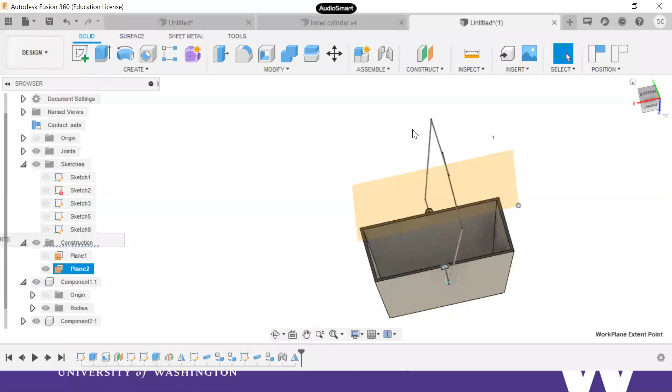I already have a rough, non-dimensioned basket. As you can see, the handles don't really meet each other because they weren't dimensioned properly. But before I get into those details, let's first see how I make the wireframe aspect of the basket, and how to make a basket such as this.

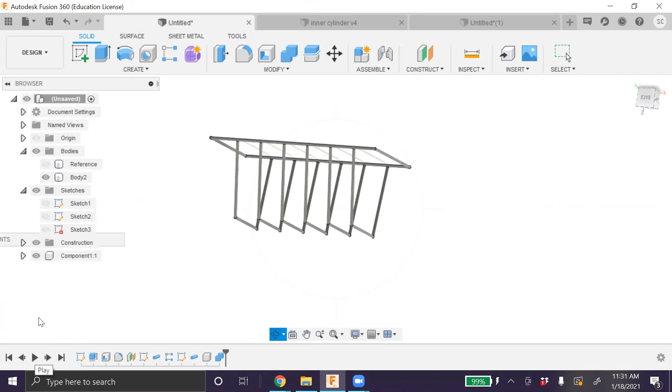Let me slow it down and switch on all the reference planes and sketches so that they're all visible for you. Let's go back to the timeline and see.

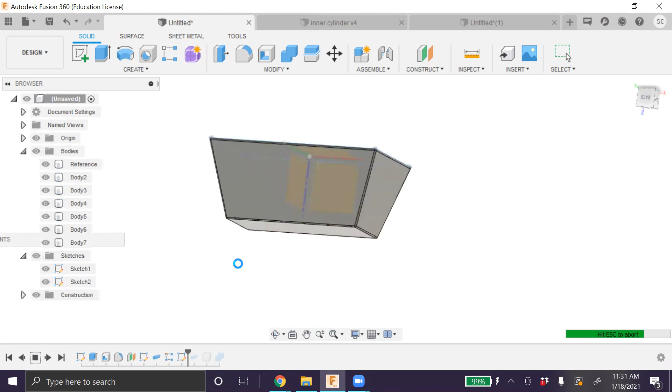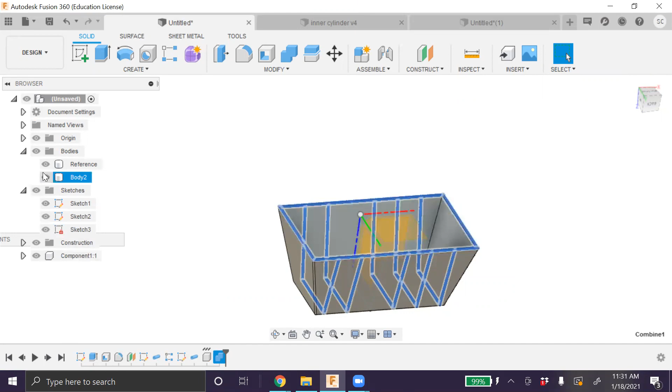So: extrude a box, give it a taper angle, draw, give it a fillet, draw the outer curvature, make pipes out of it, and hide the base body so you can see the structure.

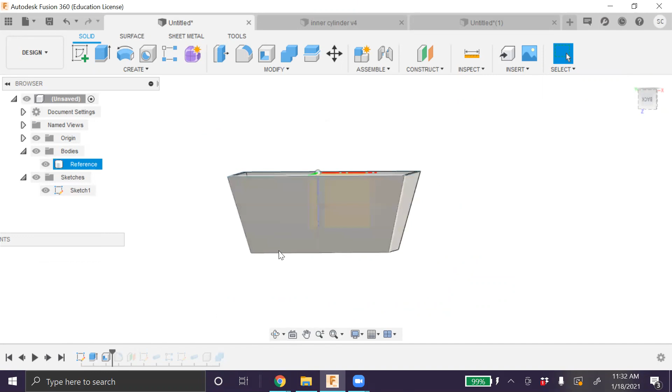Let's look at it a little more slowly, one step at a time. What I have is a basic structure that I extruded. I used the shell command to create the hollow basket shape. Now I have the basic shape of a basket, but this is not yet a wireframe model.

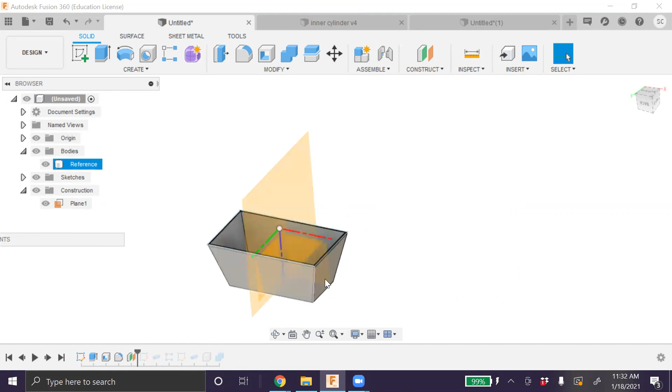So I go ahead and add some fillet, and then take a reference plane. I create a reference plane along this one, so you can see what construction is on which plane. I create this plane in the mid plane between this plane and this slanted plane, and then I draw a U-shaped, or rather V-shaped, line.

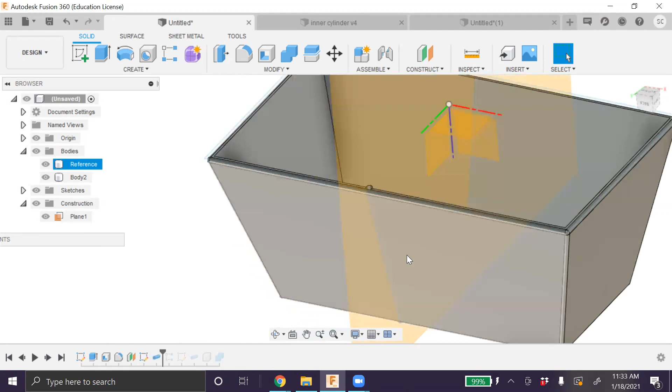This, as you can see, is very similar to the outside portion. If I go ahead and give it a pipe command, hiding the reference, I already have one single unit of what makes up the multiple wireframes.

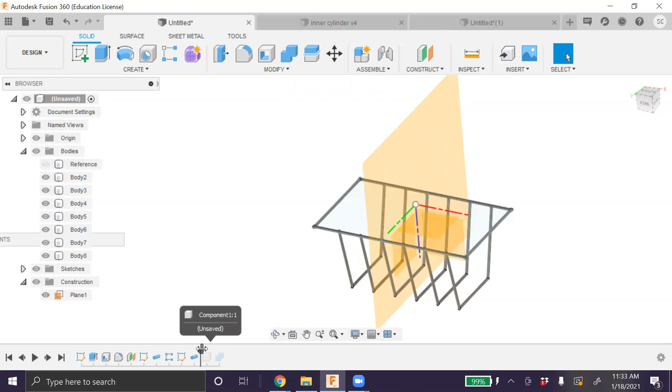Go ahead and pattern it linearly. Take the top sketch, make a pipe out of it, and make components out of them.

Well, this step is not really necessary except for assembly modeling. And then combine the objects.

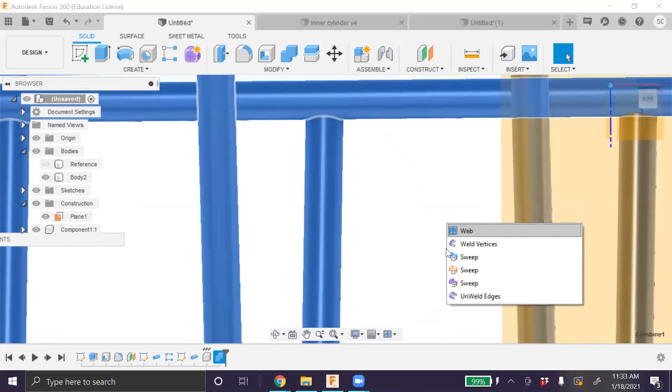Now you will notice that over here, the components are not completely joined. So I would create a T-spline on these joints and use something called the weld vertices command to weld them together.

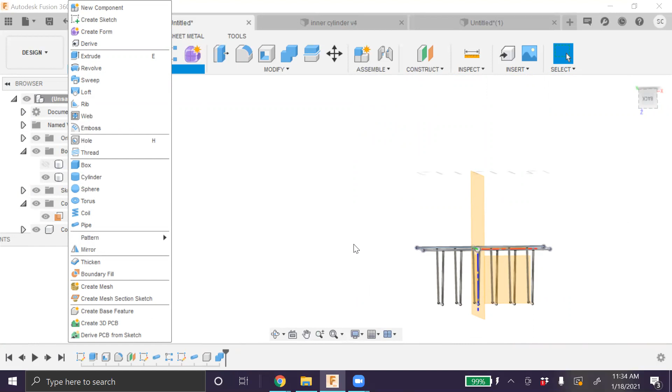Alternatively, you can also use something called the web command. Instead of creating pipes, you can draw a sketch. How the web command works - I had asked you in previous videos to look into web and rib commands. If you haven't, please go ahead and try them. You create an open sketch, create a thin feature, and extrude it out to give you a surface like this, kind of like the ribs you see in extrusion-molded plastics in dustbins, water bottles, etc. That's another way to do it.

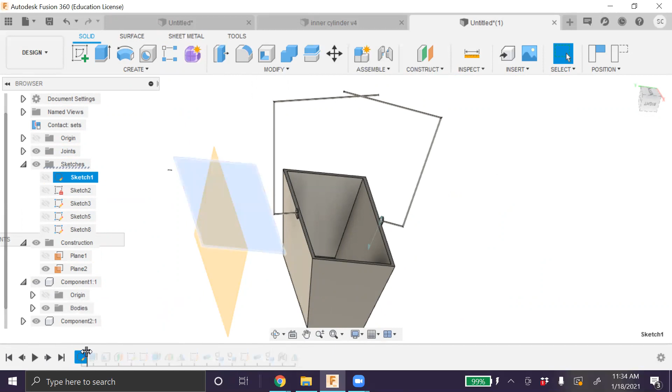In this drawing, I'm not doing any of those things. Instead, what I'm trying to do here is create this handle, which is of more prominent importance to me. So for that, let me go back in the timeline - extrude it out, I shelled it, and added a construction plane.

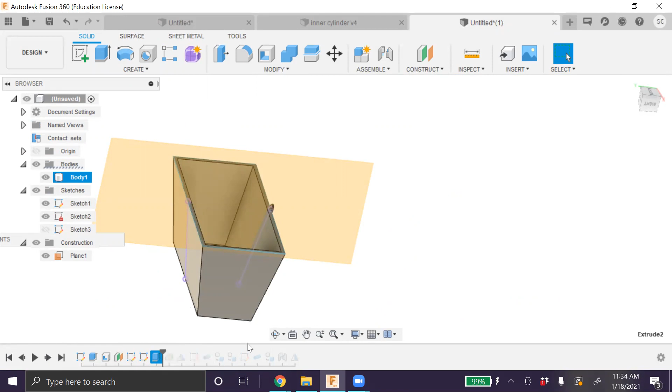I'll show you the construction plane for ease of access. I added a construction plane and took these two lines and made them reference lines. Then I drew out the notch which will hold the handle with respect to this line. Then I mirrored it about this mid plane.

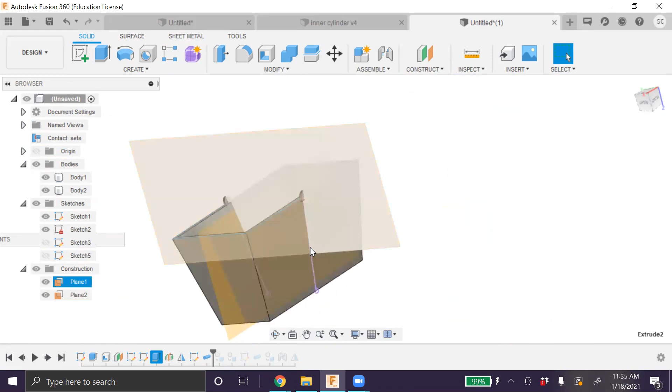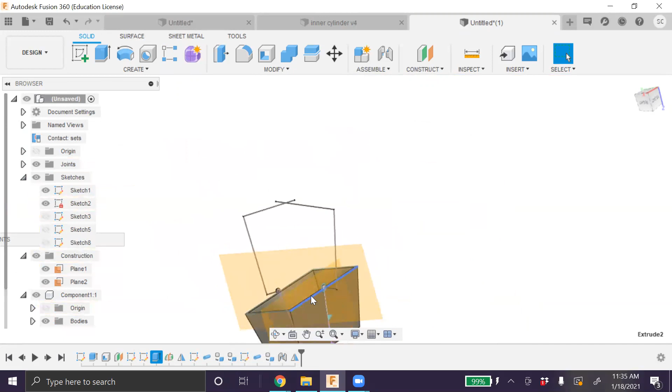And using a pipe command, I generated a pipe from this very shape, the U shape that we saw before, converted them all to components, drew it out, and it comes off over here. I created one half of it, then I assemble this with this, then I mirror it about this.

Now it seems very easy when I show it on a timeline, and it is easy when we're going to go ahead and make it. So if you want, here's a step-by-step tutorial to make things way more easier. Let us just take one of the side views, say I take the right side and sketch on this.

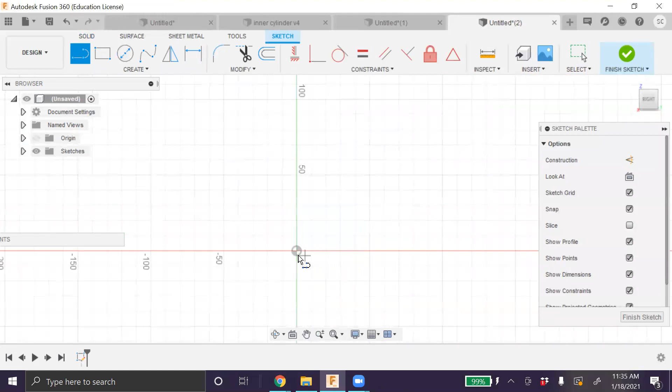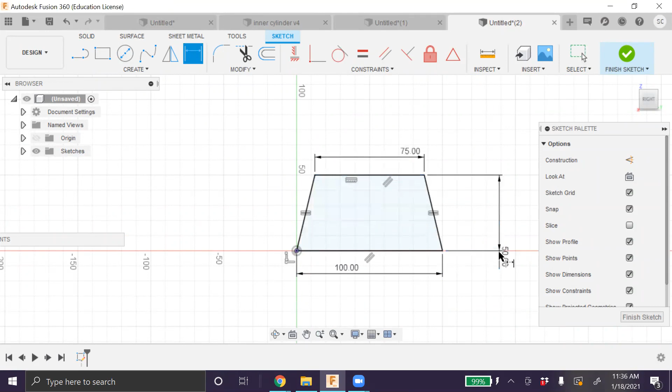This is how a basket would look from the side. Just gonna make them equal. Dimension, let's see, I want to make this 100. So this say 75, and distance between them so 50. This is a fully constrained sketch, finished sketch, extruded.

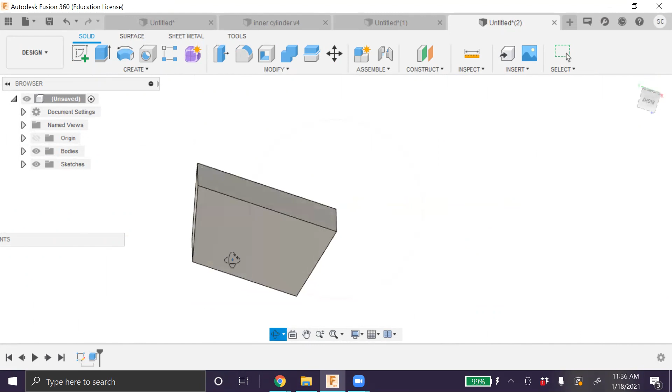I'm going to extrude it for about 75. Well, it's a box. I might go ahead and extrude it a bit more, or maybe not.

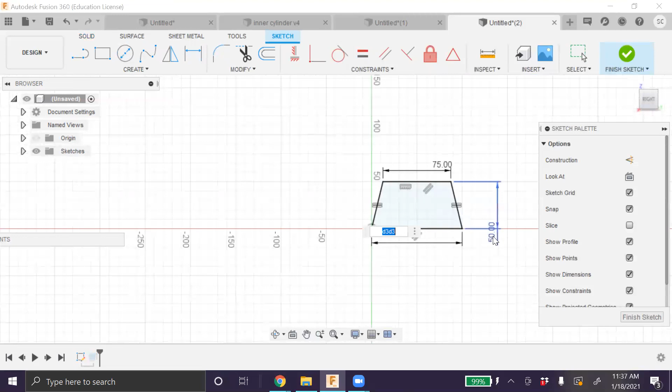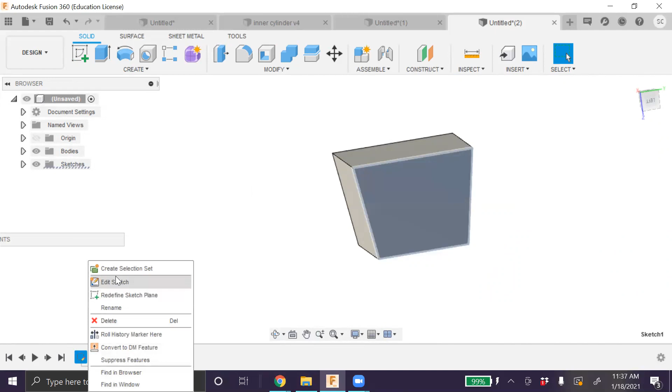So I have a shape here. Alternatively, there's just another way of creating the basket shape. The easier alternative would be to finish the sketch, extrude it out, choose the profile, extrude for like 80 mm,

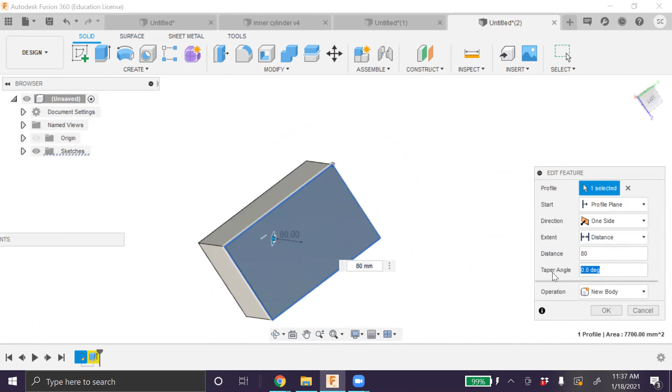and give the minus 15 tapering angle. There, easier. The only problem being you might have to calculate, if you're going to go with dimensions, what 15-degree taper actually means, whereas in the previous sketch method you just have to give the heights and the gap between the non-parallel and parallel lines, a trapezoid, and you're done. Next, let's go

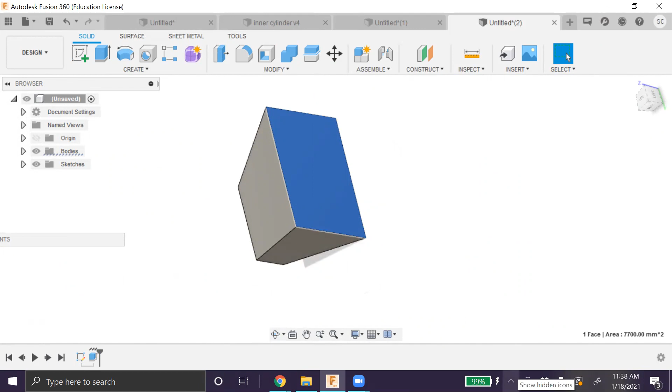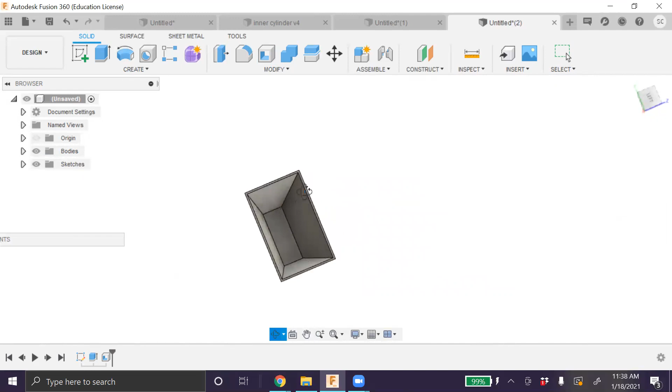and use the shell command. Give it 2 mm thickness? Sure. Now I have a kind of basket looking shape, but because the dimensions aren't great, I don't really like the shape much.

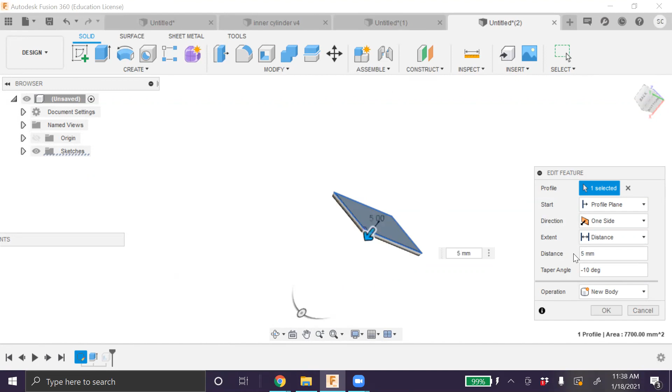Right, now I'm going to create a sketch on the surface. Let us take this. There's another interesting command.

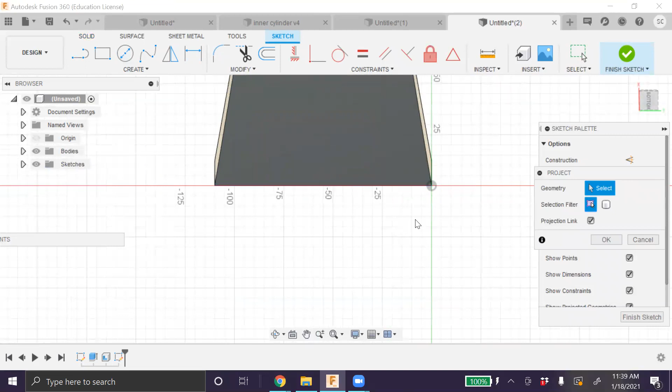When you look for create, there's something called a project, by the short form. What it does is if you have this line as a part of another 3D model, you can now have it as a part of your sketch. Why am I doing that? Because I need to make a line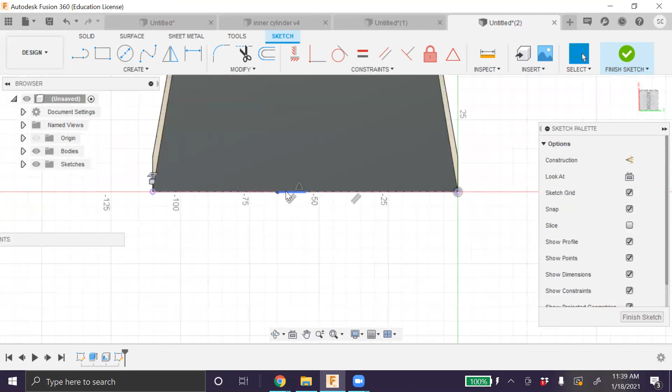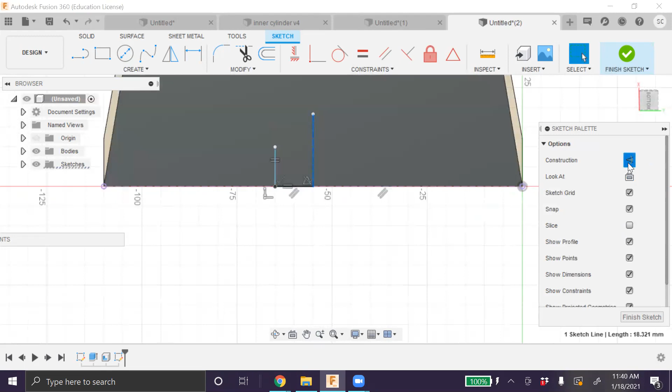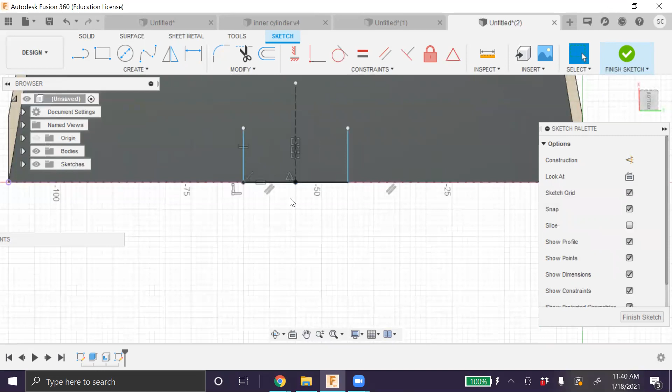and create an arc. Mirror line. Click on it. It's somewhat bigger than I want, so I'm gonna fix the dimensions: 5 and 5. Then 3 and 3, much better.

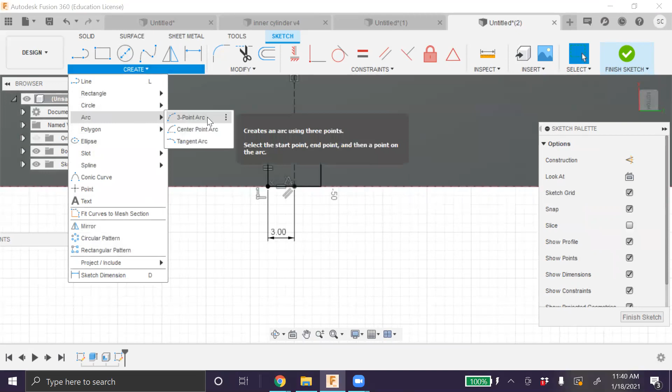Then now create an arc, 3-point arc, see? As you saw, a center point arc might have given you something as if you picked one of these as a center and you drew it from there. I wanted a 3-point arc.

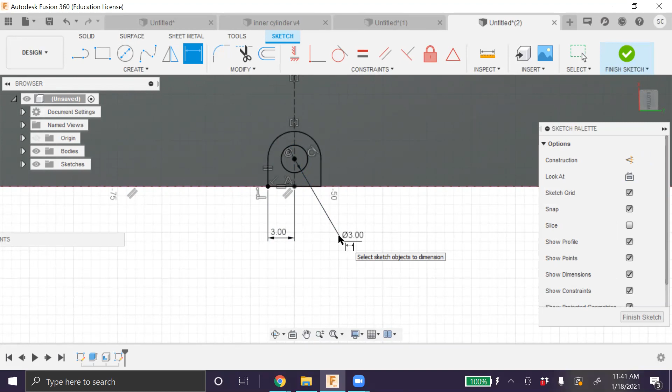That is done. I'm going to go ahead and create a circle. Remember the dimension of the circle. I'm making a 3 mm diameter. Remember the diameter of the circle. You will know why I want you to remember the dimension of the diameter.

There's sketch. Now once this is done, I'm going to go ahead and extrude this body, not much, just about 0.75 mm. Okay, now that that is done,

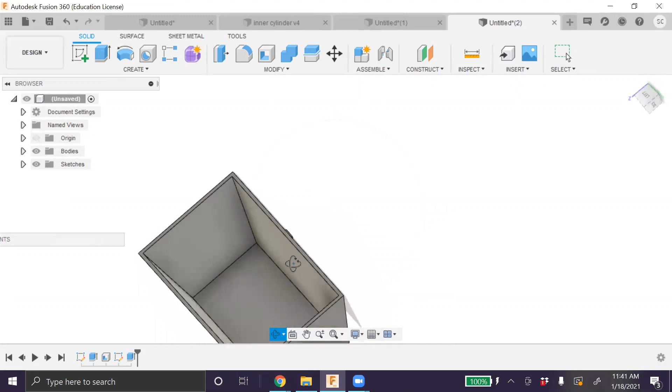let's mirror it about the other side. Easiest way to do is take midplane, choose the planes between which you want it to be a midplane. Okay, and now mirror command.

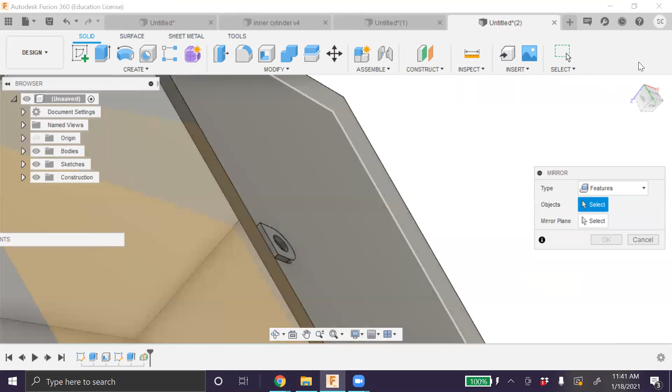Now because the bodies are merged, let's take the feature command, features instead of body this time. Select the mirror plane, and there we have ourselves two of these

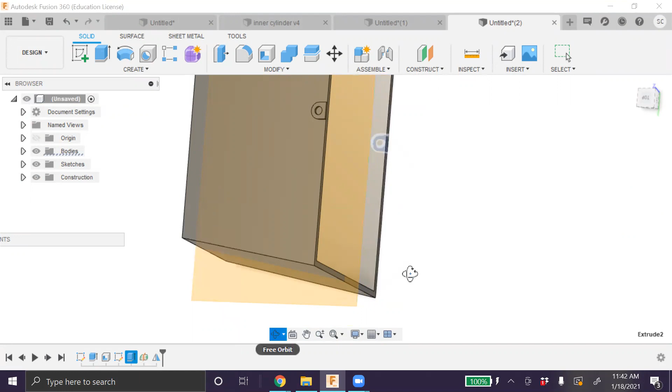shapes. Now there's something else I wanted to do in this extrusion is because these are, as opposed to what I had envisioned, I drew them the other way around. If you see in this drawing, you will realize that these notches were on the top side, whereas in this they've been flipped.

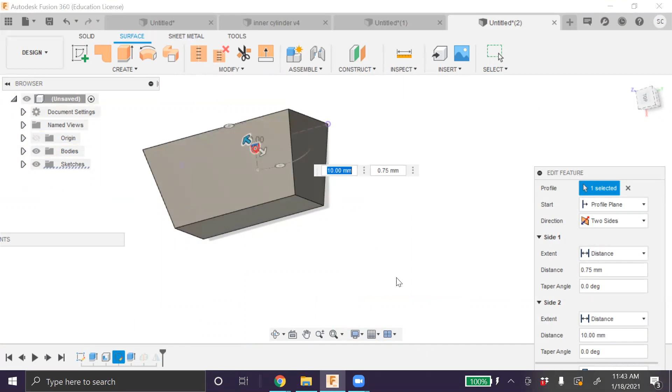So instead of correcting that, I'm just going to go back to extrude and just going to do the two-sided extrude. Or you could sketch out from here and draw it out.

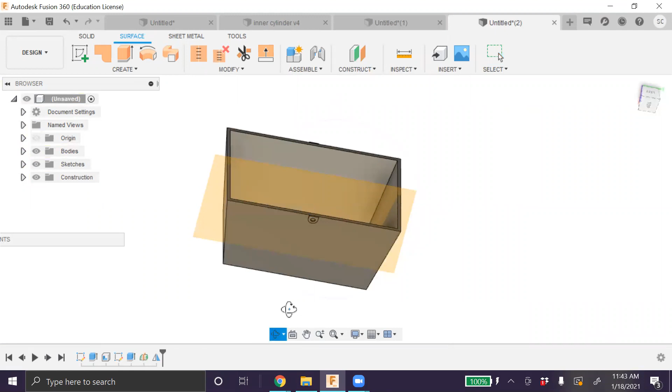Now, the more important part is to create the pipe, so I will look over here. I know, take the dimension of the width of the basket into account when you draw the handles for the pipe. You don't want them to intersect like this, you want them to join neatly. So the easier way to do that would be

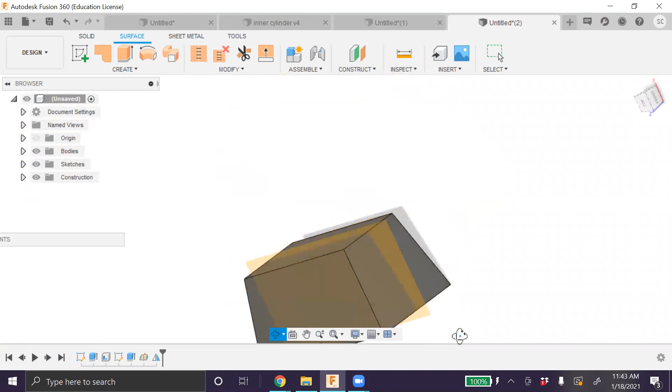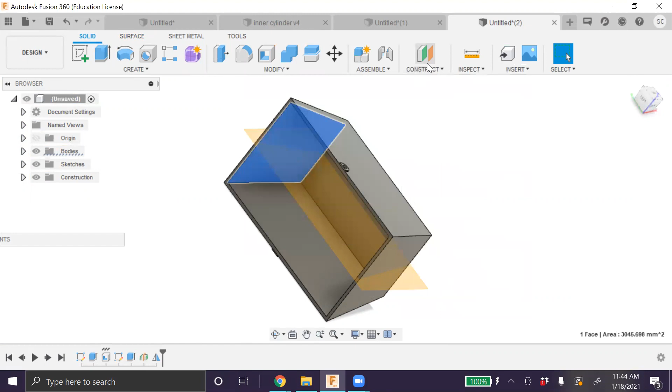let me try to take a plane, let's see. Let's come back to solid. Let's try to construct a plane. I'm going to construct. Let me see if I can construct a plane between these two features. It shouldn't be a huge deal.

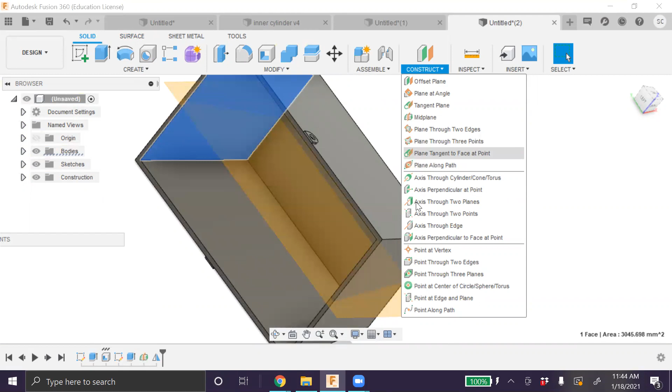Plane tangent to face at a point. Not what I want. Let's just draw it directly on this plane. Take this plane, sketch, take this line, and this line. Project them. Project the lines, not the faces.

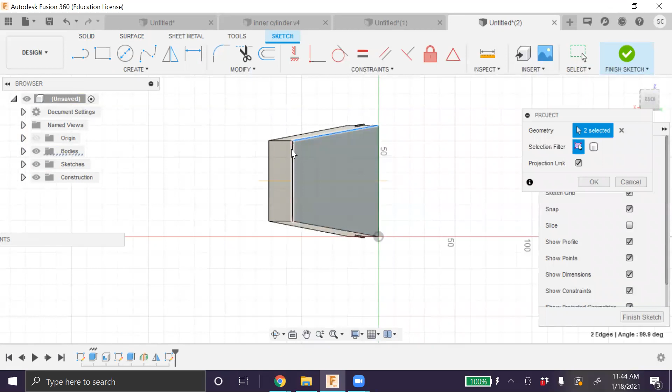Okay, now finish sketch. Sorry, that would probably not work.

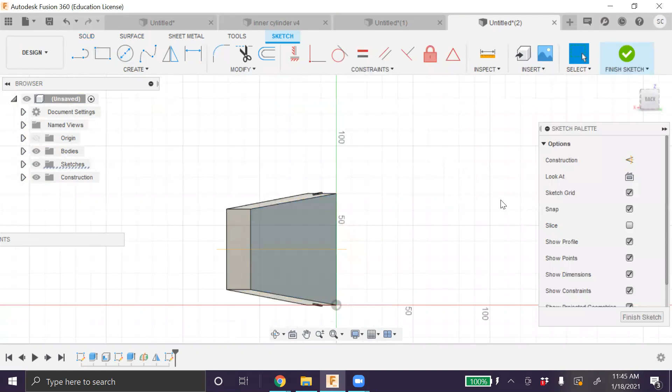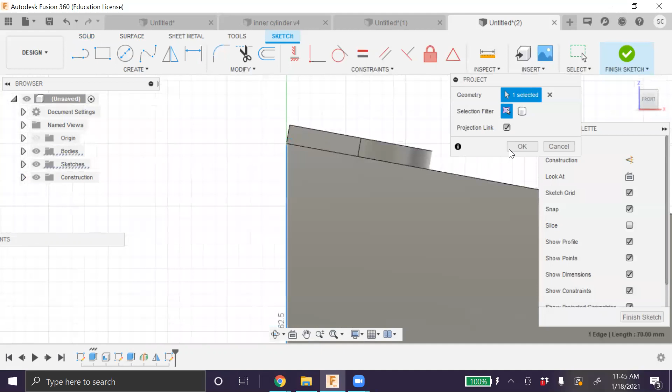Take a line. What I'm doing here, if you notice, make it a construction. Now you get that point to draw.

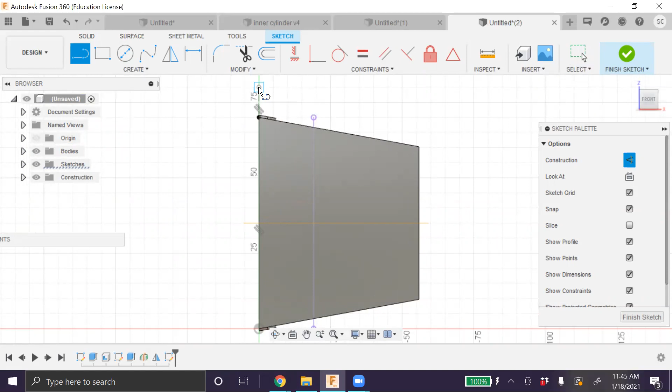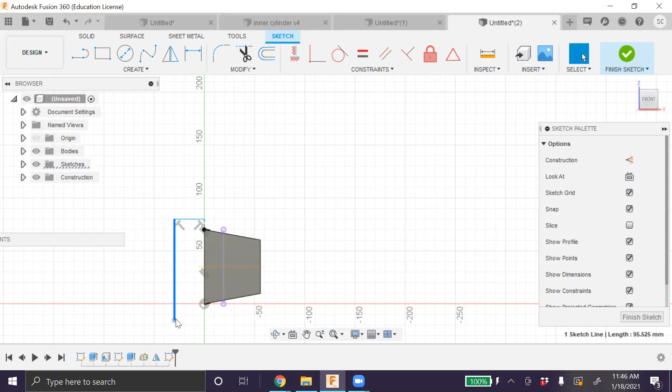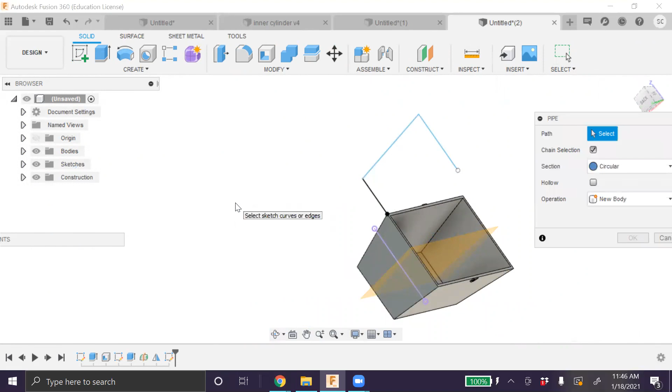These are not dimensioned again, so you might see a bit of an overlap, but this will serve the purpose. Finish sketch. Right. Now go ahead, take the pipe command again. There you have it. Your pipe is now ready.

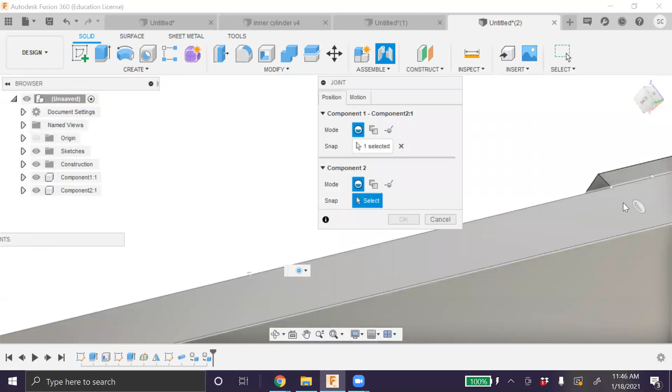Now I have two bodies. So my body 1, I'm going to make it a component. Body 2, I'm going to make it a component. Now I'm going to take the joint, take this, and snap it in place.

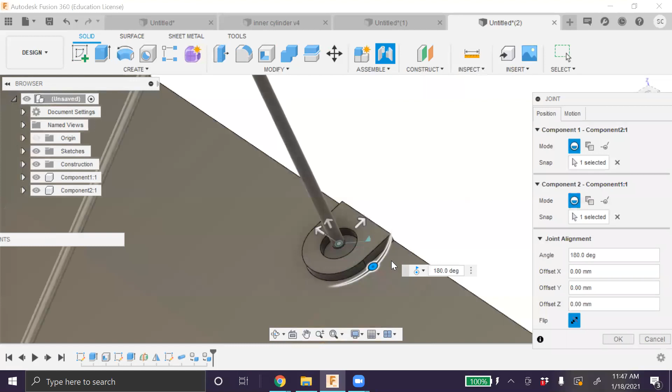With this, now this is a ball rotation. However, if you make it a revolute, you will notice you make it a revolute joint. Let's try rigid joint - it won't move at all. A revolute one would move across. You can set limitations to your revolution by giving it an angle.

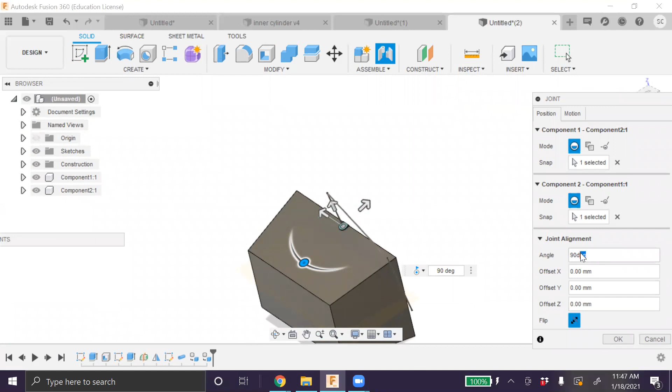So now when you say revolute, it moves completely, but stops instead of completing the full 90-degree twist that's supposed to complete if it starts from a point.

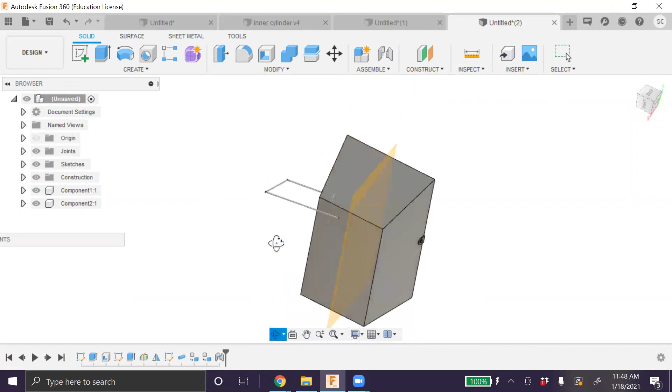Alright, so that was adding the constraints. Great, now one part of it is done. I'm going to go ahead and don't really need this construction.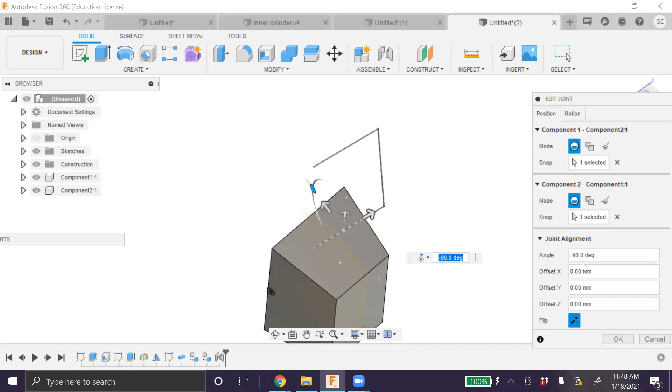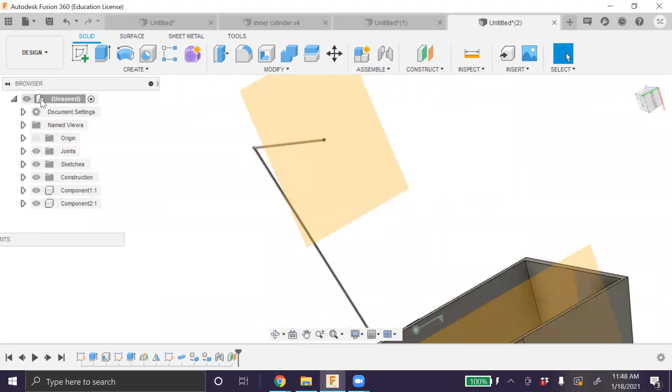Now take this face, construct a plane on this face at no offset distance. I think you know where this is going. Mirror it, mirror this body about this mirror plane.

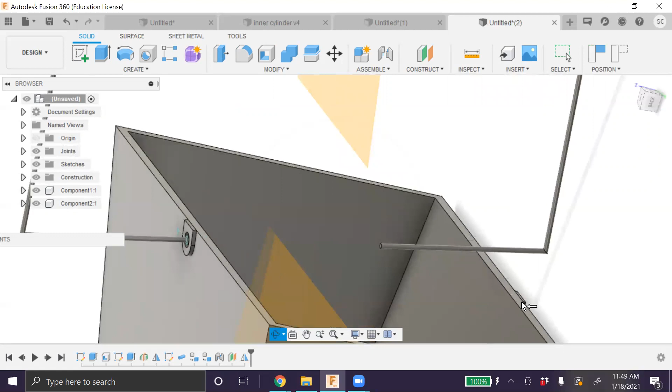There you have it. Now you can see that if I try to make a joint over here, this would probably not make a joint over here like this, because these two are not equally divided. If you wanted them to be equally divided, take this measurement, take this length to be half of the length of your base. But since this was not measured out properly, we had something like this.

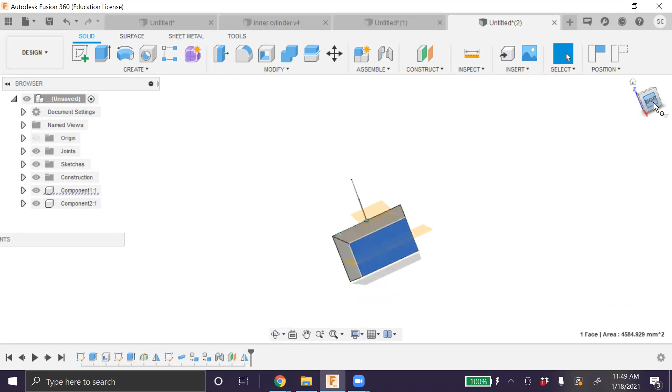Now when you make the axles and shaft, go to the bottom. For you to make shafts, you will not the bottom view, sorry, take a side view. You will have to add a shaft over here, and then you'll have to add a shaft on the other end. So you will have two cylindrical rods underneath this.

You can either draw a circle and extrude it, or draw it separately and join it using the joint feature, and then add wheels to it. Wheels will be rotating, so those are revolute joints. Your shaft will be fixed rigidly to the body.

So that was about some tricks to use with respect to your project. This is not the only way to do it. What I'm giving you is how to use the tools that we have done previously, how to use all of them and put them together in the most abstract way possible.

What I want you to do is use these tutorials as a basis to build your own drawing, to kind of sit with the problem, struggle a bit with the interface, go around messing a bit with the interface to figure out the answers to the final problem.

And the reason why I'm asking you to do this is while I can give you an exact copy of the model that you have to make and you can just follow the steps reading the video, that will not develop your skills as a designer. However, struggling a bit with the software, taking abstract concepts and building on them will definitely improve your thought process as a designer.